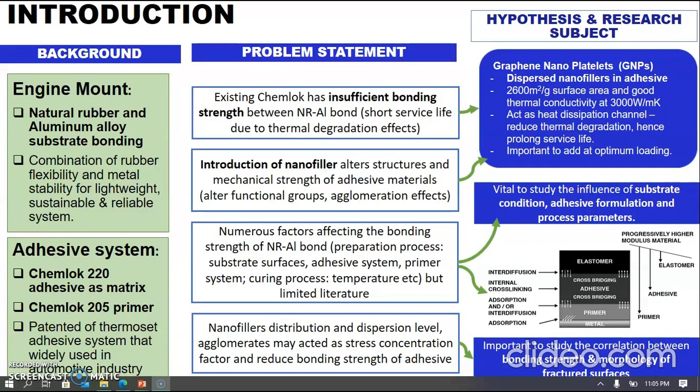I would like to present my project entitled Graphene Nanoplatelets Modified Chemlok Adhesive System for Natural Rubber Aluminum Alloy Bonding. Firstly, in the introduction part, I would like to start with the background study related to engine mounts. The combination of metal stability and rubber flexibility is good to use in isolation systems. The adhesive system used in the project is a two-coat system, Chemlok 220 adhesive and Chemlok 205 primer.

There are 4 problem statements in this study. Firstly, the existing Chemlok has insufficient bonding strength for the natural rubber aluminum bond. Secondly, the introduction of nanofiller alters the structure and mechanical strength of adhesive material. Therefore, it comes to the research subject that graphene nanoplatelets, GNP, are used as nanofiller in adhesive due to high surface area and good thermal conductivity.

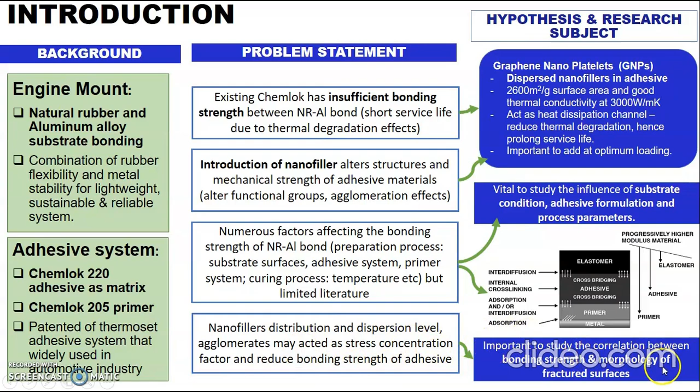The third problem statement is there are limited studies on factors affecting the bonding strength of a natural rubber aluminum bond. Therefore, it is vital to study the influence of substrate condition, adhesive formulation, and process parameters. Last but not least, the agglomeration issue in nanofiller may act as a stress concentration factor and reduce the bonding strength of adhesive. Therefore, it is important to study the correlation between bonding strength and morphology of the fracture surface.

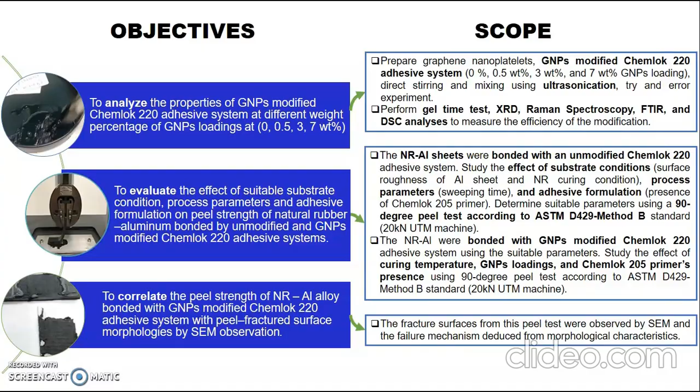The objectives relate to the scope. The first objective is to analyze the properties of the modified graphene adhesive system at different weight percentages of GNP loading by XRD, Raman, FTIR, and DSC. Secondly, to evaluate the effect of suitable substrate condition, process parameters, and adhesive formulation by 90-degree peel test according to ASTM D429 method B. And lastly, to correlate the peel strength of NR-aluminum alloy bonded with a GNP modified Chemlok adhesive system with peel fracture surface morphology by SEM observation.

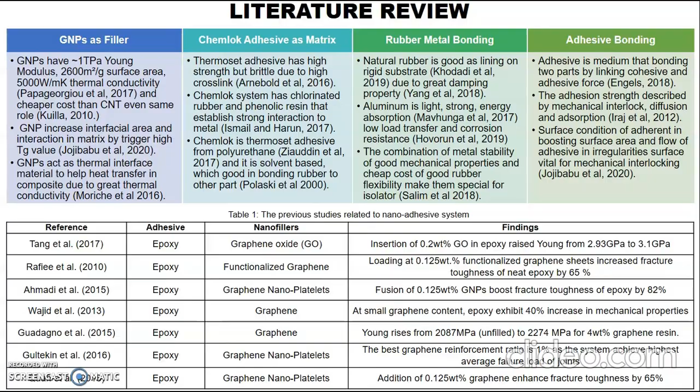In the literature review part, there are 5 main keywords which are GNP as filler, Chemlok adhesive as matrix, rubber metal bonding, adhesive bonding, and nano adhesive system. Table 1 shows previous studies related to nano adhesives, the mechanical properties of epoxy enhanced with small loading of graphene.

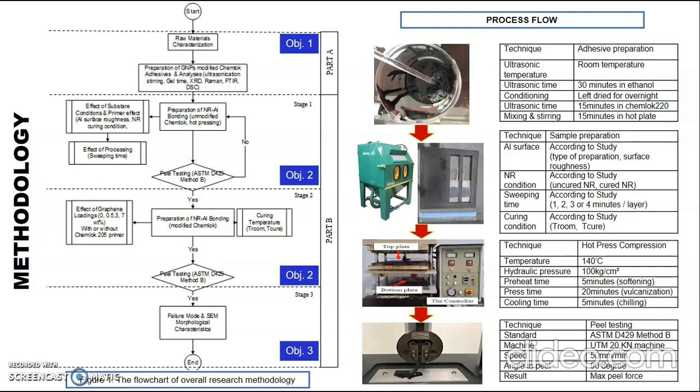Next part is methodology. This methodology part is divided into part A and part B. Part A is for objective 1, part B is divided into stage 1, 2, and 3. Stage 1 and 2 for objective 2 and stage 3 for objective 3. This is the process flow. It includes adhesive preparation, sample preparation, hot press compression, and peel testing.

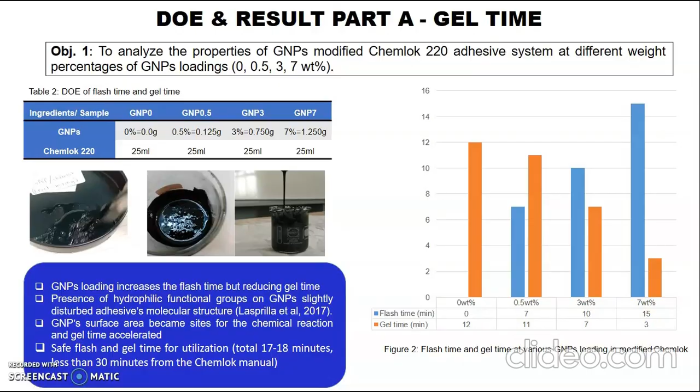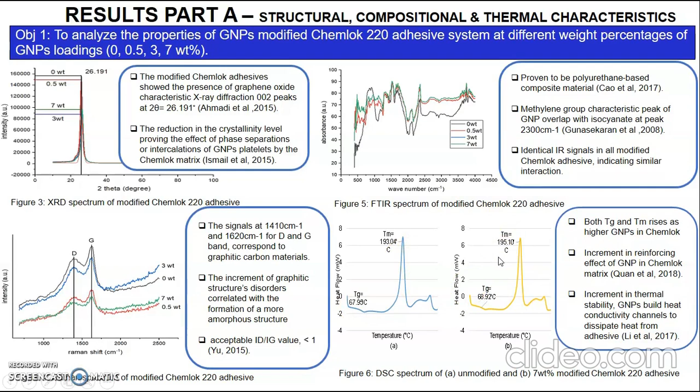From the compositional analysis, it can be seen that the Chemlok has characteristic peaks like a polyurethane-based composite. The methylene characteristic peak of GNP overlaps with the isocyanate functional group at the peak of 2300 per centimeter wave number. And last but not least, the thermal analysis. Both Tg and Tm increase as the GNP increases. This proves that GNP plays a good role to build a path for heat dissipation.

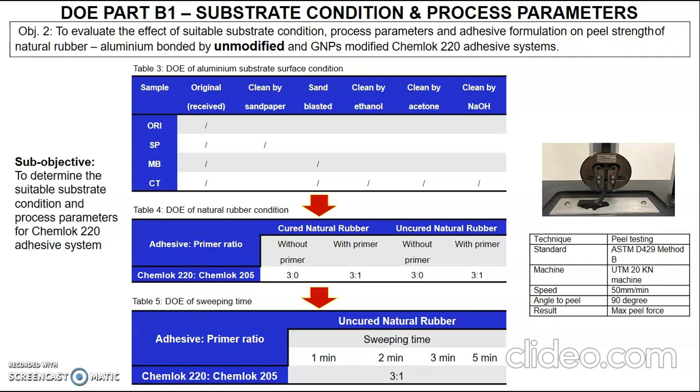Now, this is the result from the previous DOE. Peel strength increased as the aluminum roughness was reduced. For example, the sandpaper sample shows the highest peel strength value. Safari et al. 2020 also state that high Ra will give poor wetting.

And mechanical blasting was selected for the ease of processability and more uniform properties. Figure 8 shows that uncured natural rubber is better than cured natural rubber due to vulcanization occurring. And the effect of sweeping time shows best in 2 minute sweeping time. Too long sweeping time and dry adhesive has low surface energy, resulting in poor wetting.

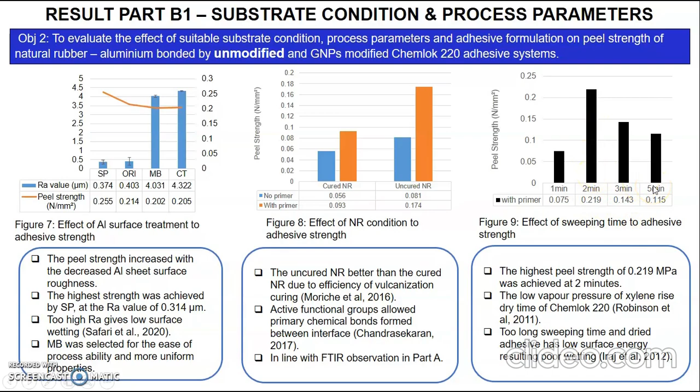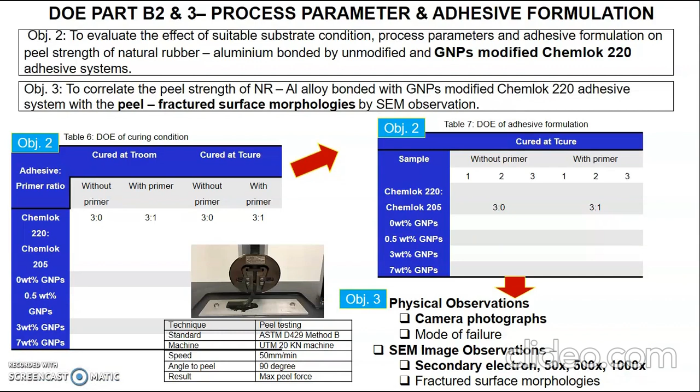The DOE for part B2 is the same as B1, which evaluates the peel strength value from the peel test, but the sample in B2 uses the modified Chemlok adhesive system. Result part B2 achieves objective 2, the effect of curing condition on adhesive strength. You can see that T-cure is better than T-room due to the presence of heat and pressure that assist the adhesive flow. And figure 11 shows the effect of adhesive formulation on adhesive strength.

You can see that with higher GNP, the peel strength increases. The peel strength increases at higher GNP and drops at a certain weight percent after achieving the maximum value. Beyond 3 weight percent GNP, it gives a trivial effect to boost adhesion since both samples have the same average peel strength value.

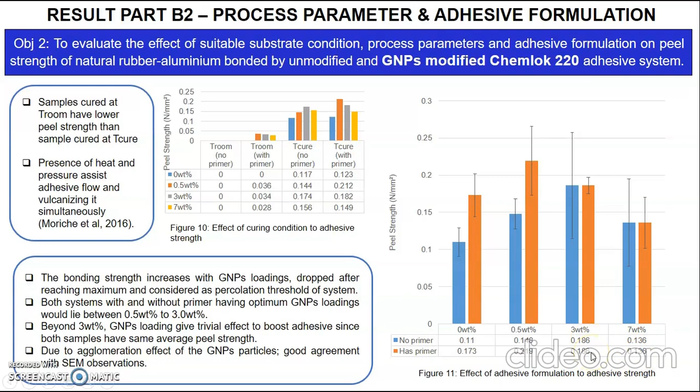And last but not least, the result part B3 is studied to achieve objective 3. Table 8 shows almost all the samples generally have a combination of cohesive and adhesive failure. Then the maximum and minimum peel strength are compared from the aluminum surface. You can see in the maximum peel strength, the aluminum surface has a wide area of adherent adhesive on the aluminum substrate, while the aluminum fractured surface with the lowest peel strength is almost clean with limited trace of adhesive or rubber.

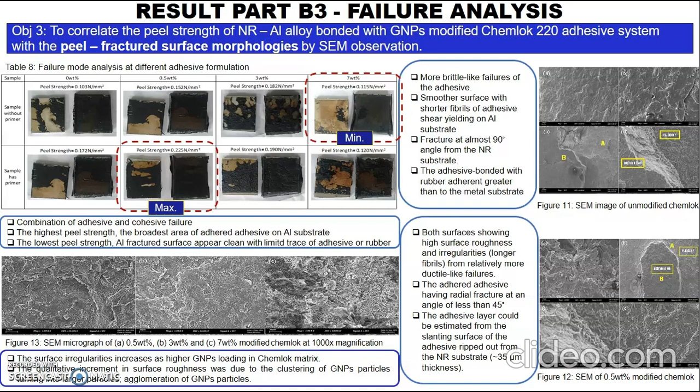Let's compare the SEM image between figure 11 and figure 12. Figure 11 is the SEM image of unmodified Chemlok. You can see that it has a smoother surface with short fibrils of adhesive, shear yielding on the aluminum substrate, while figure 12 shows both surfaces showing high surface roughness and irregularities, longer fibrils from relatively more ductile-like failure. So this proves that the rougher the surface, the harder to break, and it needs higher energy to split the rubber from the metal substrate.

To conclude, objective 1 is achieved as the analysis shows safe flash time and gel time for utilization. The structural analysis also proved the GNP presence in the modified Chemlok adhesive system. Both Tg and Tm show good thermal stability. Objective 2 is achieved as mechanical blasting and uncured natural rubber with 2 minute sweeping time were selected as suitable process parameters.

Adhesive strength increased as GNP loading increased until reaching a certain percolation threshold at 3 weight% for the system without primer and 0.5 weight% for the system with primer. The improvement in peel strength was observed to increase to about 200% with the presence of primer, and objective 3 is achieved as the bonding strength is highly correlated with the extent of failure mode.

The recommendations of this study are: first, several other dispersion techniques could be investigated. Secondly, the effect of substrate surface condition and process parameters could be further investigated. Lastly, the effect of GNP loading for a narrower range of 0.1 to 3.0 weight% GNP could be investigated further to identify a more accurate percolation threshold and optimize the GNP loading.